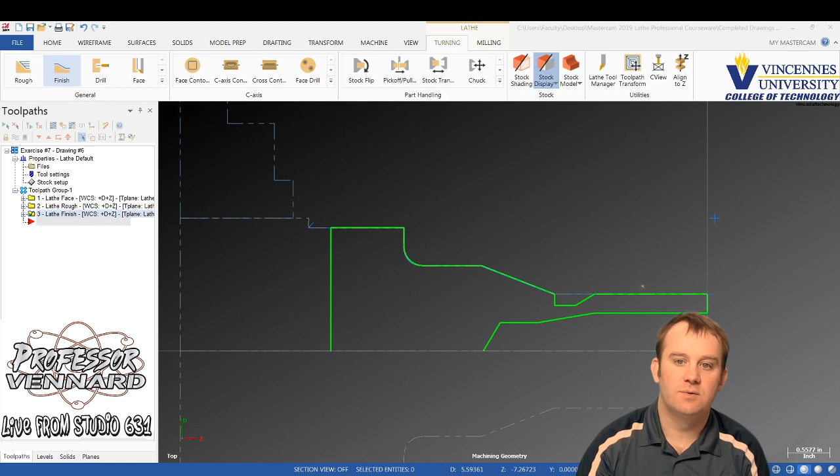All right, so we got the turning all done. We are ready to cut our groove right here. That's what we're going to do right now, so let's go ahead and get that done. We're going to go up to the drop down here, and we're going to pick groove.

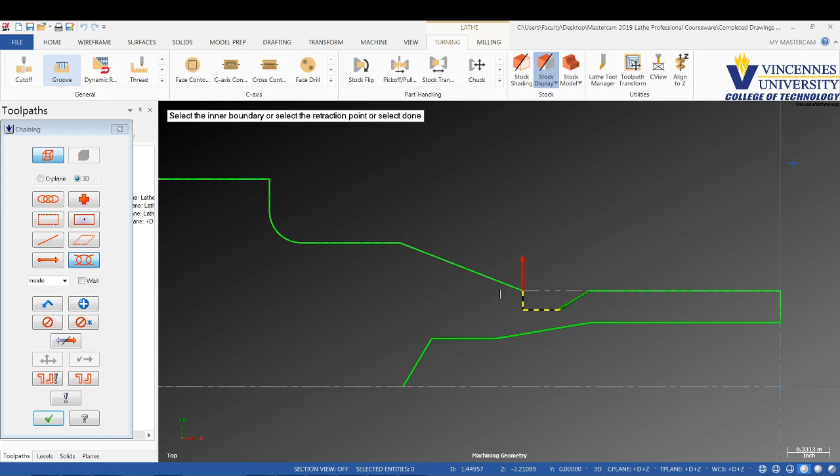The easiest thing to do with this angle that's in here on this groove is to use a chain. Since we can chain this groove, we're going to chain it starting here and ending right here. It's just going to select that groove as a chain. We don't have to sit and define the shape inside the toolpath now, the actual chain will define the shape of the groove.

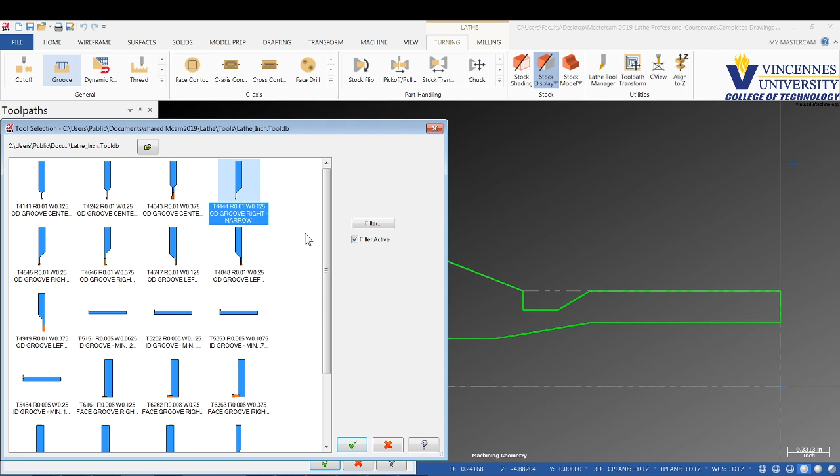For the tool, let's just go in here and see which one we want to use. You know what, I'm thinking we can get away with the 1/4 inch one, but let's go with the 1/8 inch just to be safe. I don't want to grab one that's too wide and have it not work out. So we'll use the 1/8 inch grooving tool.

And we'll set our feed rate. Everything just real slow, leave everything just kind of defaulted there. Max spindle speed, I'm going to do like 1,000 for the grooving tool. Turn on my coolant. And I'll give it a comment here: relief groove.

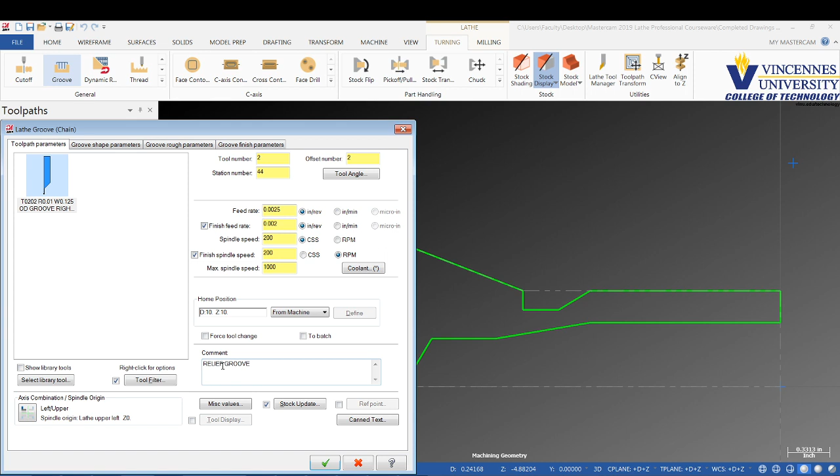Okay, and once we've got our relief groove there, what we will do is we'll go into the groove shape parameters, and we're coming straight in. And I'll use the stock for the outer boundary.

Then on the groove parameters, I'm going to go ahead and use the bidirectional, I'll leave that just like it is. It's going to start in the center and work its way out. The step amount, I'm just going to tell it 75% of the tool width. Looks good. On the step groove walls here, I'm going to tell it to smooth those so it overlaps a little bit there.

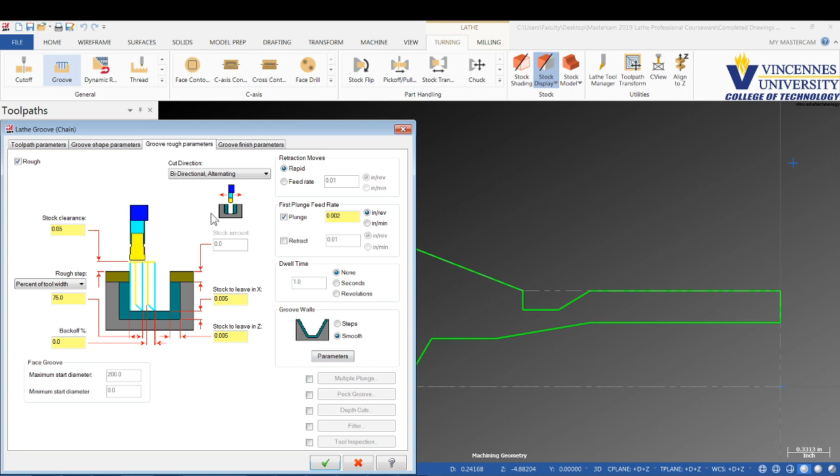And then the last thing I need to do is in my groove finish parameters, I need to come down and tell it to do some overlap. So I'm going to tell it to do like a 20 thou overlap with the tool. And in my lead in, lead out, I'm just going to tell it to come straight in on each of these. Then if we take a look at this now...

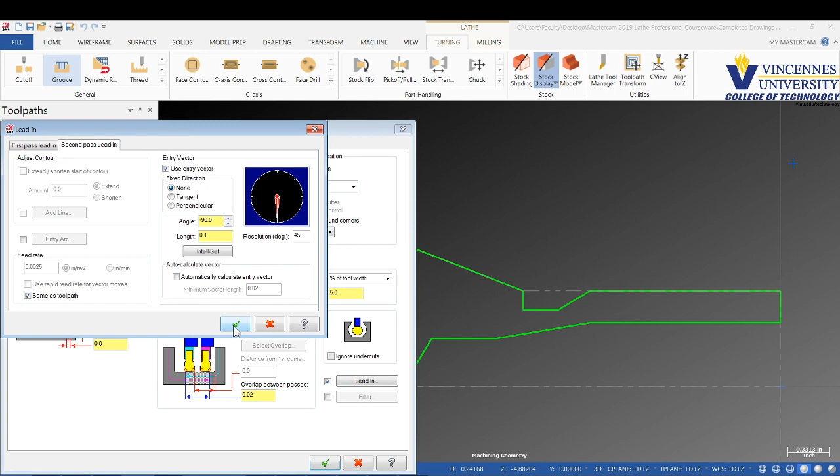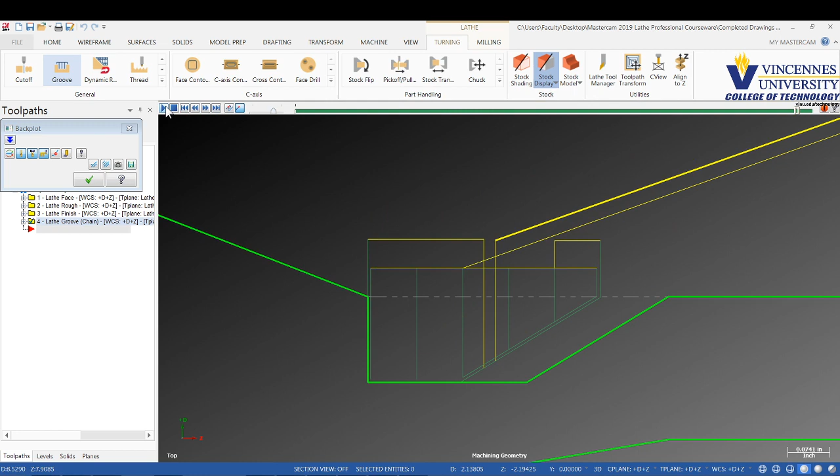There you can see what this grooving toolpath is going to look like. So it roughed it all, and if we watch this in backplot, there you can see what's going on here. Let me slow it down just a little bit and we'll watch it again. There we go, so there you see what it's doing, then it finishes, and adios.

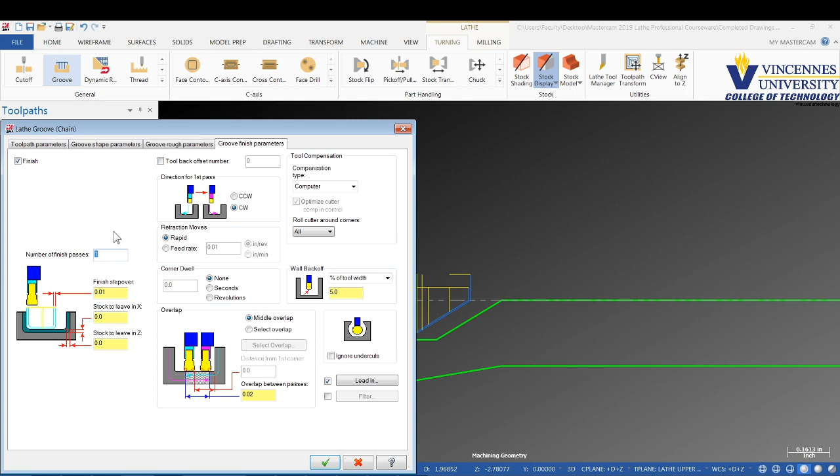Okay, so that's the grooving toolpath, pretty cut and dry. There's parameters in here for something so small we don't really get into, like the peck grooving. If we were cutting a deeper groove, we might use that and the depth cuts here, but for something so small it's just not necessary. But that's basically the basics of the grooving toolpath and how you can use a chain for an odd shaped groove. Okay, that's the end of this video.